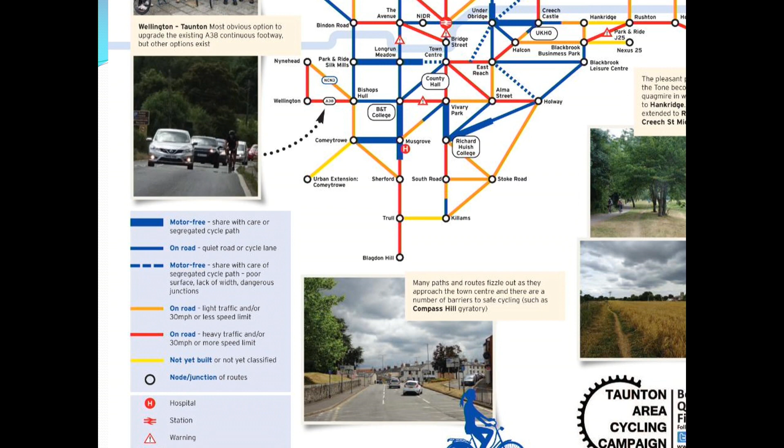We've got an amazing group of cyclists who are very keen to improve the facilities we have for cycling in Taunton. They've come up with this underground map showing the routes. The blue routes are good to cycle, the orange ones are not so good, and the red ones are to be avoided. As soon as you do something like that, you can see areas that need to be linked up. So these guys get onto the council saying there's an area here we really need to improve. Sometimes it's not such a big job, it's just that someone hasn't thought about it particularly. It might just be putting an extra cycle lane in. Things like that are quite easy to do.

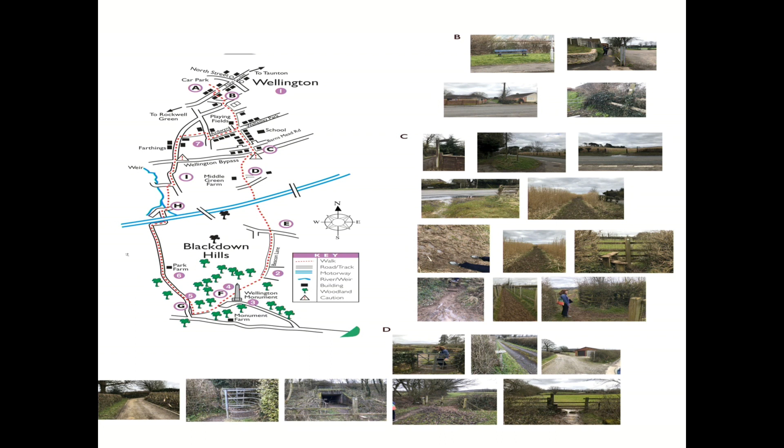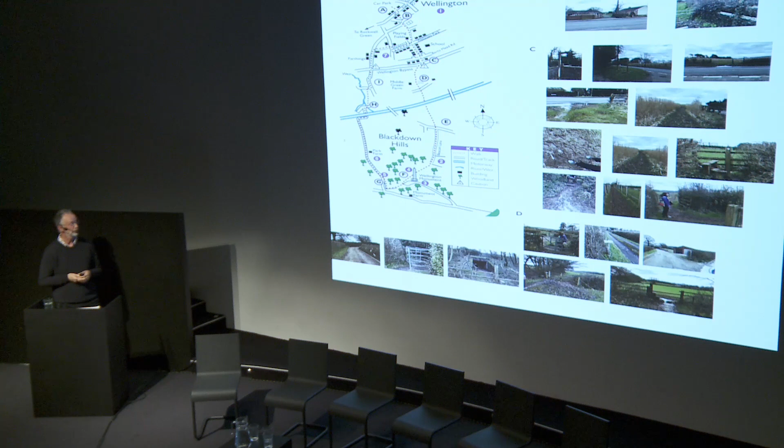We talked about getting out into the open countryside and the fresh air that comes with it. We're working on routes. There's a heritage feature here, a monument to one of our great army leaders, Wellington. It's funny in England because everyone's got their own history and things they think are important. But from my point of view, the important thing isn't the monument itself, it's an attraction, something people can head for. There are lots of obstacles to it, like a motorway, the blue strip, but fortunately there are tunnels underneath. Then it's a question of improving signage so people understand how to get there, and also improving the surfaces and the gates people have to go through, along with some of the heritage features.

One thing I've found very good for engaging with communities is working with artists. Artists come in lots of different guises, from sculptors to performance artists and visual artists, trying to engage the spaces where you've got open spaces, piazzas. I don't know Prague well enough to know how the art scene works, but there are always opportunities to get people to interact, to come out and enjoy those spaces.

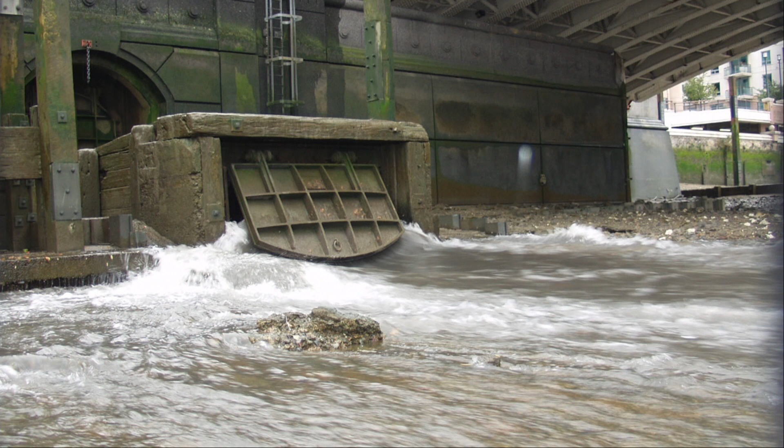Sometimes it's coming down so fast that our sewer systems can't cope, so we get flooding in our streets, sometimes in our homes. Particularly in older cities, we have old sewer networks where we mixed rainwater and foul sewage in the same pipes. When it's not raining, they can cope, and they take that sewage to a sewage treatment works. But often, because we are increasingly developing our urban environment, it puts a lot more stress on these old sewers.

And this happens in the UK. It's called a combined sewer overflow event. Basically what happens is there are these valves, so when there's too much rain in the system, a mixture of rain and sewage just flows out into our streams and rivers. That's a source of pollution to our waterways, which is something we get very upset about.

Another source of pollution is actually something we're all responsible for. We drive around our cities, and on our roads and car parks, pollution is building up every day wherever we drive. We are dropping oils and fuels, so we've got hydrocarbons, very toxic materials. We have heavy metals falling off car bodywork, off our brake discs and engine parts, and our tires wear down. Every day we drive, we lose a little bit of our tires, and that's a microplastic, and it builds up as a dust on the surface of the roads, and gets washed into streams and rivers.

In Norway, they did a study to look at their sources of microplastic in the marine environment—that's microplastics that enter the marine environment directly as a microplastic, rather than litter which slowly breaks down to microplastic. This included things like painting and maintenance of ships and boats and actual plastic production itself, things we might have heard about like washing our plastic clothing, and right at the end, the little microbeads in our cosmetics. But if you add up all those other domestic and industrial producers of marine microplastic, they still don't add up to the wear and tear from car tires from our urban environments.

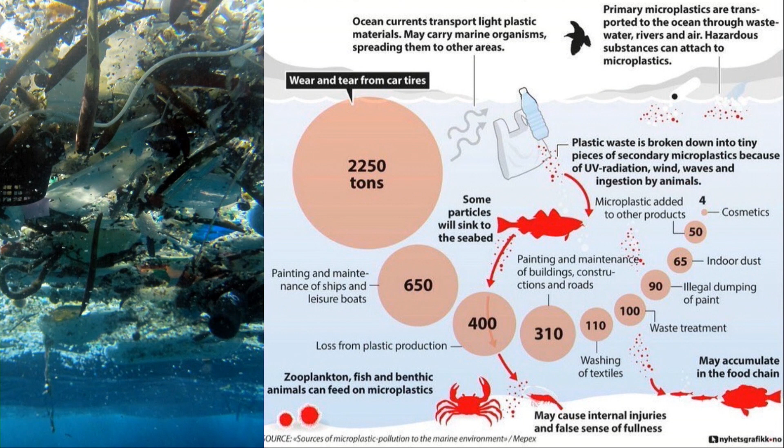Then the other issue is heat. Particularly in summer, our urban surfaces warm up, and then when it rains on them, that rain also warms up. And the warmer that water is, the less oxygen it can carry dissolved in the water. This happens in summer after a few weeks without any rain—the longer we have between rainfall events, the more pollution builds up, because it's had more time to accumulate. Particularly if in summer you have a few weeks without rain, with this pollution building up, the surfaces are nice and warm, and then you get a small rainfall event, so it doesn't have to be very big. What you get hitting the rivers is low oxygen, highly polluted, warm water.

And really the solution is we're trying to emulate nature. So we're not trying to make our urban environments woodlands and forests, but we're trying to look at the qualities of how nature manages rain, because we do it so differently.

So in nature, what we find is actually most of the rain that lands on a natural landscape is either evaporated or transpired by plants. If it does get through to the forest canopy or the natural landscape floor, it then tends to soak into the ground, enters deep into aquifers and our geology, may start traveling across the surface eventually and start filling up ponds and wetlands and little what we call ephemeral ponds, temporary ponds, where depressions in the landscape fill up with water, and might very slowly migrate their way through soils and through geology to

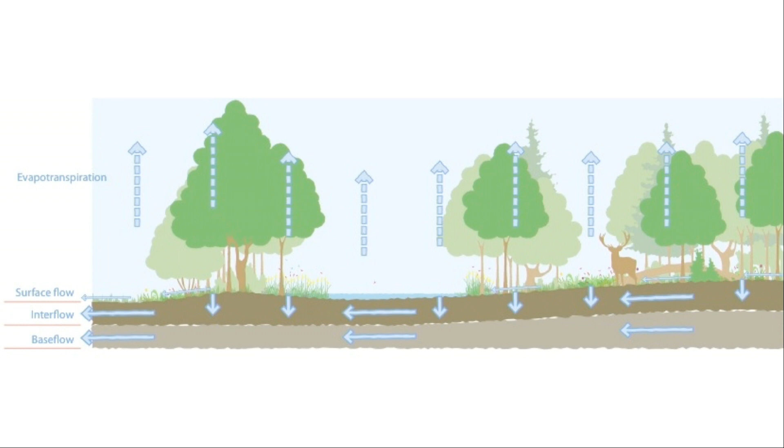streams and rivers. And what we see in the natural landscape is then very few flows at the surface. So these tiny little arrows at the top indicate that actually what we see traveling over the surface is very minimal, and there's also a huge delay before that happens. So after a rainfall event, there are huge delays for the rain that lands on that landscape. Most of it is lost, and then what does make its way to streams and rivers does so very slowly.

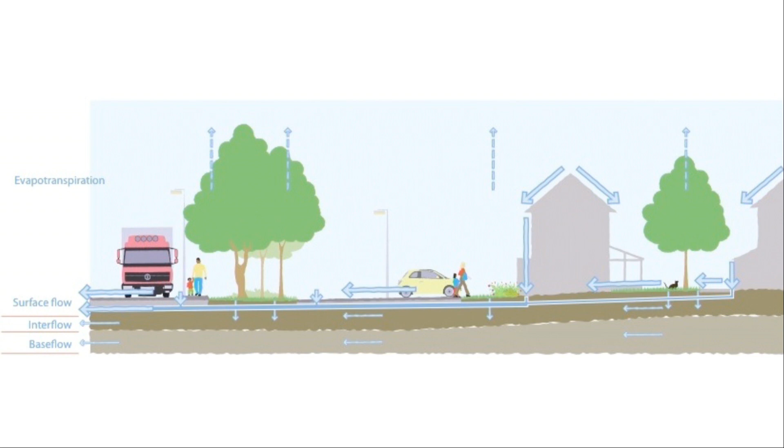In the urban environment, this could almost be Prague, just try and imagine. You have nicer buildings and nicer paving and more Skodas, but apart from that, it could be Prague. In this urban environment, it behaves very, very differently. So we've paved all our surfaces. We have taken away all the opportunity for water to be lost into the ground. We have much less vegetation, so we have much less transpiration of water up into the air.

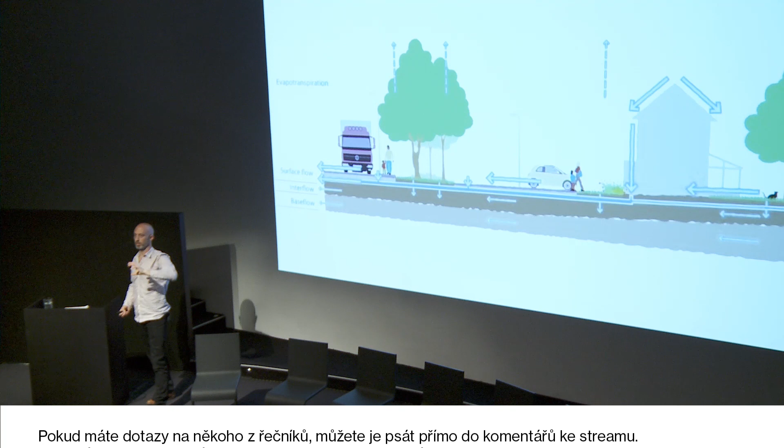And what we see is a reversal of all those arrows. So we've stolen water from the ground, we've stolen water from the air, so we have much bigger volumes now, rushing more at the surface, either as surface flow or in our surface sewers, going straight to streams and rivers. And so what we see is a really intense rainfall event landing on an urban environment very quickly delivers a really intense burst of water into our streams and rivers or sewers, and they just can't cope with that pattern of water.

And what we need to do is ask our urban environments to behave very differently. So we need to ask them to behave hydraulically much more like the natural environment. We need to ask them to work a lot harder. Every surface of the urban environment, we need to challenge it to work harder with rainwater, so that we can reverse those arrows back again, so that we can maximize evapotranspiration, maximize losses into the ground. And we need our urban environments to act like a sponge. We may have heard the term sponge cities, they call it in China. And with our landscapes, we try and create sponges.

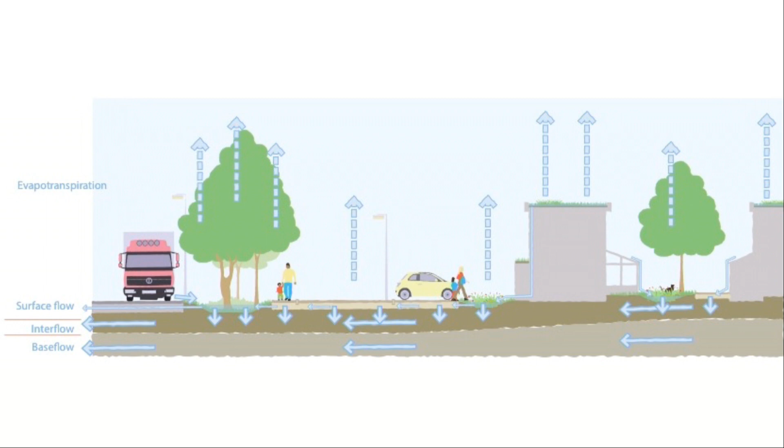They would get as close as they can, kick their kid out of the car, and then fight all the other drivers to get back out again. And that led to a lot of pollution. It made this road very dangerous to cross. So that was a vicious cycle. People were then even more inclined to drive because that felt like the safest thing to do. So it didn't work socially. It wasn't a healthy or a safe route to school, and the local community wanted to change that.

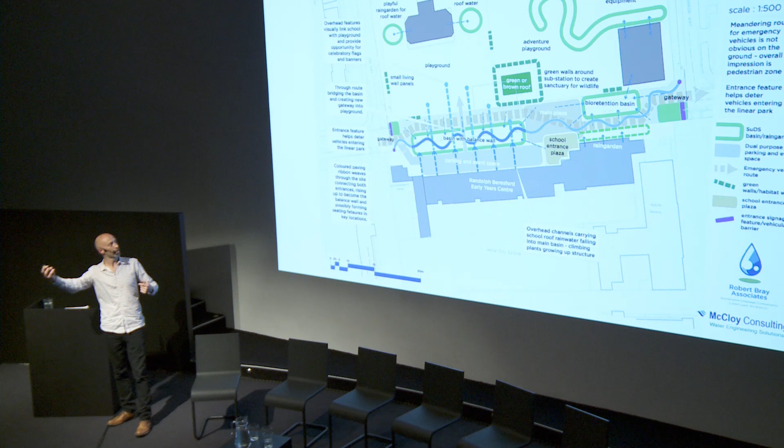So we did much like most landscape architects would do. We look at the character of the space, the ingredients we might put in here, the benefits to people and wildlife. There's a few water management features in there. But we always consider the water management in tandem with everything else we do as a landscape architect, all those other considerations of people, place, and wildlife. Water is just another one of those we consider completely simultaneously. We came up with the concept ideas of how we might manage the water off the school roofs, the hard surfaces themselves, trying to steal water from as many adjacent roofs as we could to maximize the impact of our scheme.

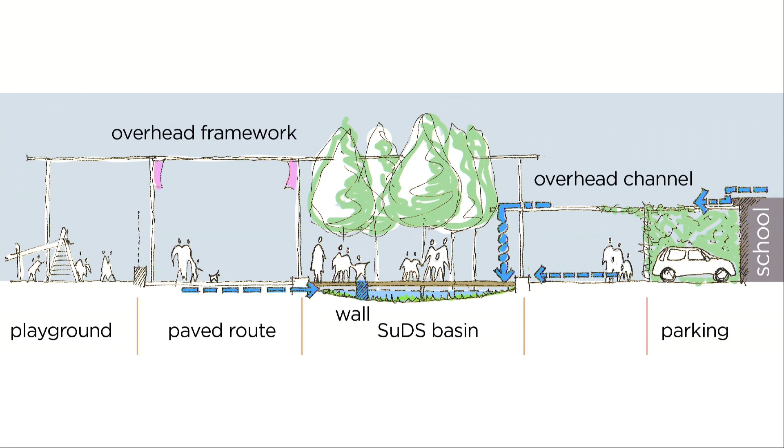And right through the very early concept ideas, these early sectional sketches, we're looking at how we can create some visual connection between the school and the playground, make this a dynamic, playful, family-orientated space, at the same time as we're thinking how water might be part of that, how we can take water off a roof and bring it overhead. The opportunity is that water is higher on a roof, so we can bring it overhead and drop it into the center of the space in really interesting ways. Fill up basins where we have the wall feature and bridges, so people can interact with these features that occasionally have water in and see them fill up when it rains.

So these more developed sketches, you can see we're looking at what these ingredients might look like. Some of these are just about placemaking, connectivity, new gateways into the playground. But then we're also looking at the idea of the basin with the wall running through it and these water features coming down. And this is what we produced.

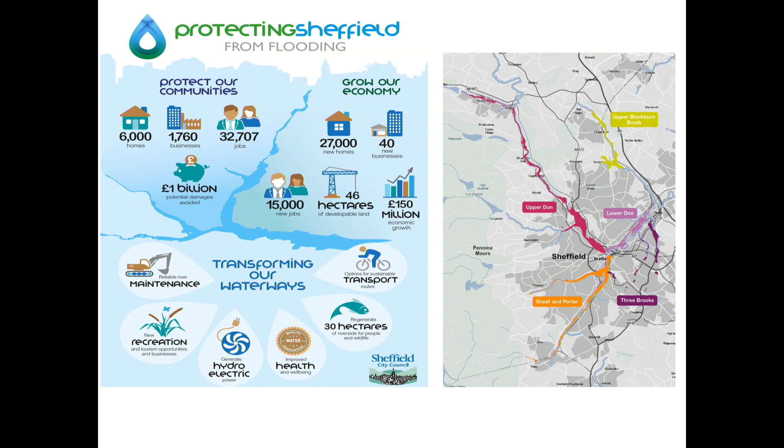Businesses are obviously incredibly important for the economy, so we reduce the flood risk to encourage development. But obviously also here, transforming our waterways. Can we think creatively about how we do that? Can we get other benefits at the same time, like biodiversity, recreation? It brings in other money as well. So being creative - just some examples here.

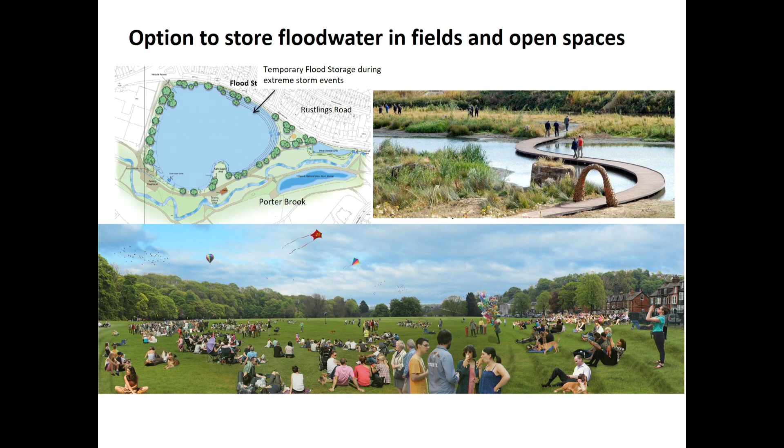We're looking at this park, which is one of the most popular parks, but it's right on the river. Can we use that park and modify it to hold water, hundreds of thousands of cubic meters of water, allow the river to flood into there, hold back, and basically this floods the railway station in the worst events. So we're trying to reduce that as a key transport hub.

So this was trying to be creative with flood defences. It's not always just shove a wall up. We're trying to reduce the walls - that's the traditional default, we build a wall, keep the river out. This is just trying to be more creative with walls, integrating it with green space, access to the river, trying to make an asset at the same time.

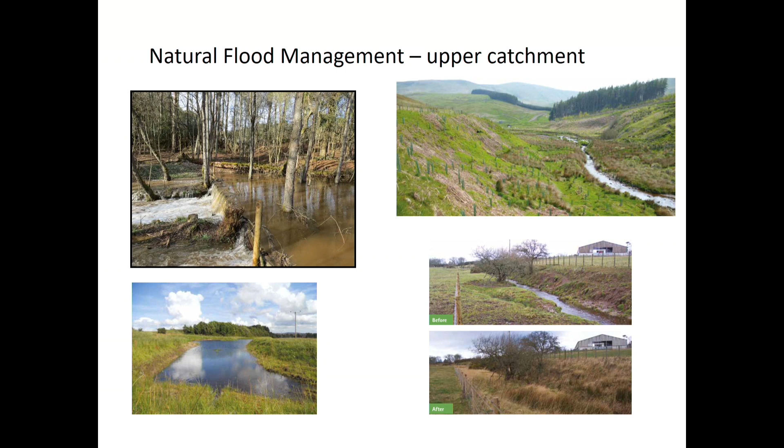Just to say, we're starting to look outside the city - how do you keep rain from coming into the city on those river systems, holding the flow back, looking at the whole rural environment around Sheffield. A variety of ideas: creating wetlands and ponds within farmland, creating woody dams, planting woodland. Woodland obviously intercepts rain, intercepts in the canopies, promotes infiltration. That can really improve the catchment response and take the peak off rivers. So this is the macro blue-green, if you like, outside the city.

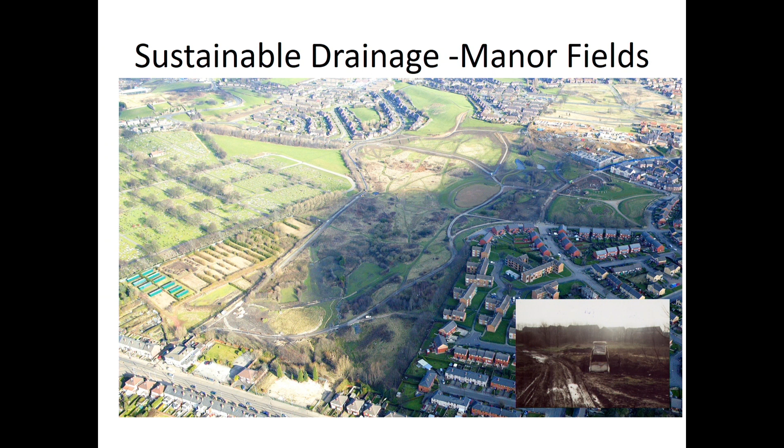Just briefly talk about this project I was involved with from just before 2000. This is a new park in a very difficult area socially - lots of housing had been demolished because it's in such poor condition. This was trying to build a park, a place for 25,000 people. They didn't have a park, but it was abused - massive amounts of car racing, stolen cars every weekend. I'd come and clear those away. So it was really problematic.

This is a multi-year project, so it's still happening, but it was about teasing out the green infrastructure that was there. It was just filled with cars and rubbish and arson and burning - it was an awful, dangerous place. So it's a matter of teasing out the green infrastructure and framing that as something that's been cared for. That's the semi-natural vegetation we're trying to bring back to life, and the water as well. This was filled with rubbish, this stream, literally meters of rubbish within a channel. So the blue becoming a positive asset.

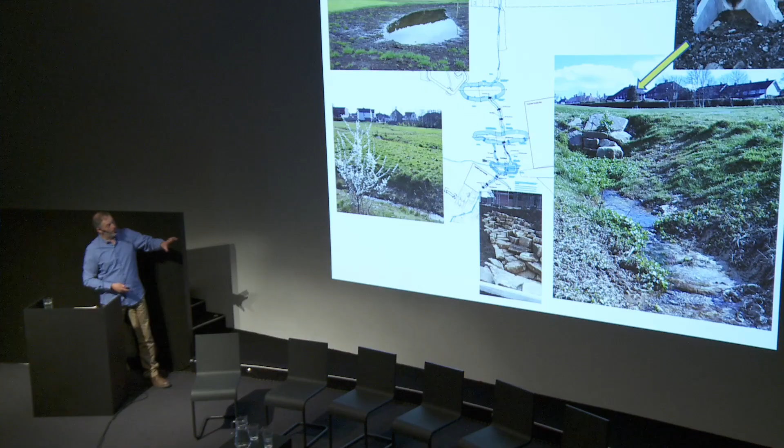So just a few slides of schemes that have gone in relatively recently on parks, just holding water in different situations. This one is holding about 6,000 cubic meters from 7 hectares of housing, a series of wetlands and channels. This is now going to be maturing over the next year, but that's a huge saving for those developments.

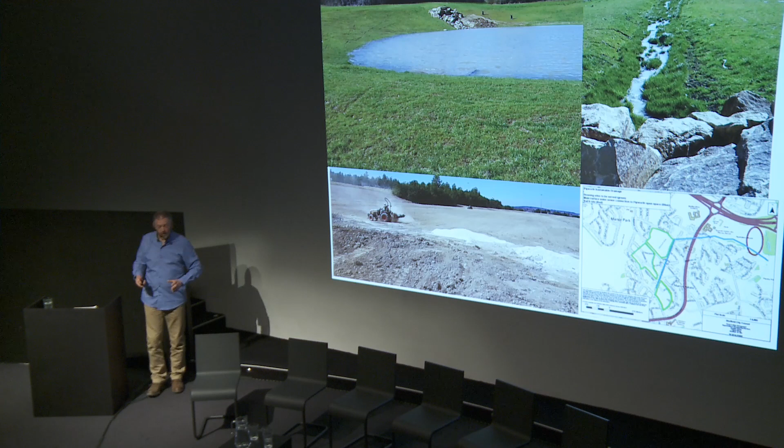And I should just say, for all these developments, each household is paying only about £20, so about €22 a year for all the services of managing this water on these parks. It's a small amount of money, but it gives us income forever to look after these facilities.

So we've explored this with the water company. We have private water companies in England, and it's really difficult working with a profit-making organisation. But we're examining the whole sewer system for the city. Where are the problems where you might get surface flooding or more pollution, like Kevin was talking about, the combined sewer overflows, polluting watercourses. There's a lot of that in Sheffield. How can we pull the flow using those sort of retrofit SUD schemes in the street scene?

I'm going to talk about Grey to Green, that's the title in my presentation, but this is our flagship retrofit SUDs. It's the one that's making people see that you can do this. Yes, it's a high profile setting, but the principles are all there. This is the city centre of Sheffield.

Briefly talk about some of the ideas. We've got these routes, these coloured routes, the gold route and the steel route, as they're called. These are kind of routes of improvement in the public realm to get more quality to the city. So you can read the city as you go through it, and it's very clear where you're going from the railway station here up through the main part, and different zones of the city, like the cultural industry quarter, the retail quarter, hang around those routes.

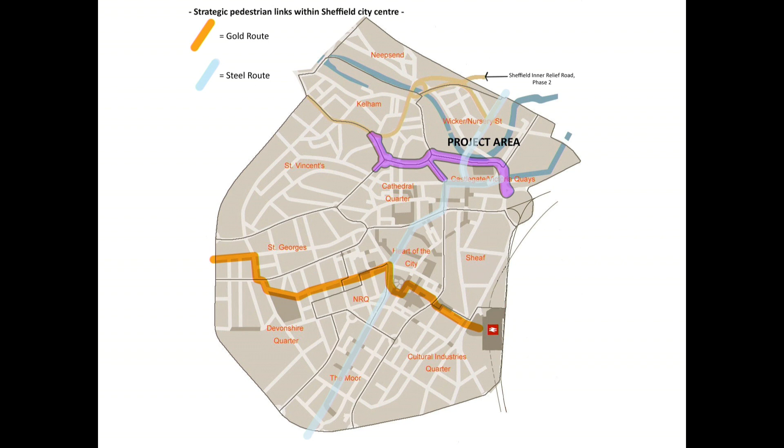The purple route is the Grey to Green route, and that's really emerged because at the top of the slide, we actually moved the traffic out of the city centre. There was a huge flow along that purple route of most of the traffic going towards the main motorway for Sheffield. And it was right, really, in the heart of the city. So they chose to move that traffic to the north.

I'm going to talk briefly about Grey to Green now. The principles behind it is that creating a setting for investment. This is very much a regeneration project, changing the nature of an area to encourage the building out of plots,

the increase in land value, and the employment and so on in that area. But saying, well, actually, could we do things, layer this up and get lots of benefits from one footprint? Can we use the new green areas for managing surface water? Could we create more cycle routes, pedestrian connectivity across the city? Could we do the planting differently? Not your standard vegetation, something that can actually provide biodiversity, as much colour through the year as possible, and quite an informal sort of vegetation.

And the city garden is this principle that cities are changing. Certainly Sheffield struggles retail-wise. It's no longer kind of shopping only for city centres. It needs to do other things. We have out-of-town shopping centres. We need to have other attractions in cities. There's more people living in cities, in the city centre. So the horticultural excellence is something that we want to promote in the city.

And the SUDs idea there is this isn't necessarily a big problem of water in this area. It's saying, well, while we're doing this regeneration, we're going to take an opportunity. We're going to regret nothing. We're going to build water into these landscapes to demonstrate it. It's in effect like future-proofing.

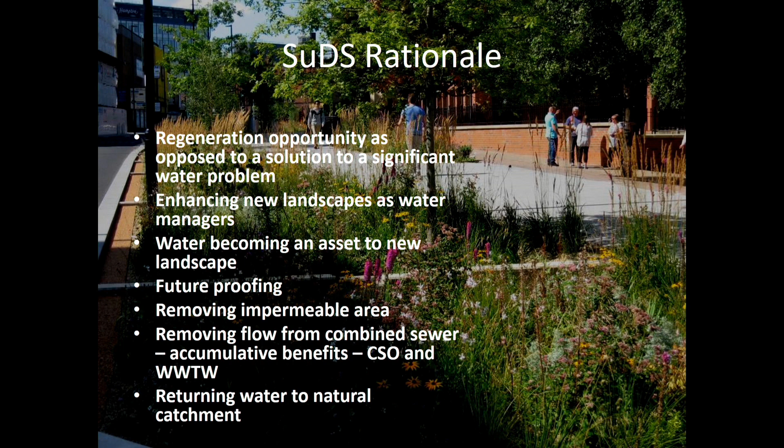We're taking out impermeable area. We're improving the performance of drainage in that area. We're taking that flow out of the sewer, and we're taking it to the river in this case. So we're returning it to its natural route, cleaned and controlled through this system.

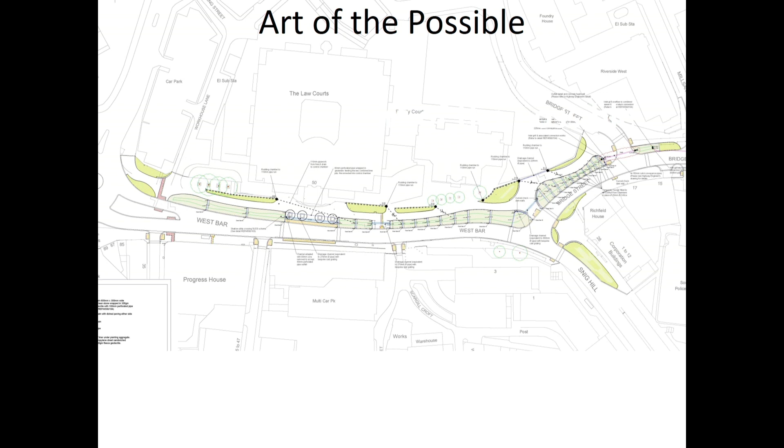And the art of the possible, I suppose what I'll describe here is linear along the road, and it's divided into a series of cells because it falls from one end to the other, and we've effectively created lots of level spaces along this route that hold the water. And that gives you what you can deliver in terms of water benefit. You've got the contributing roads and paths, and these cells hold that water back.

You know, people are walking this route now to work. They've chosen this route because it's an attractive place to be. It's full of colour all the way through the year. You know, that's the sort of story that we've heard so far happening here with Grey to Green. And that immersion within vegetation within the city, almost like you're in the countryside, that meadow surrounding the footpaths.

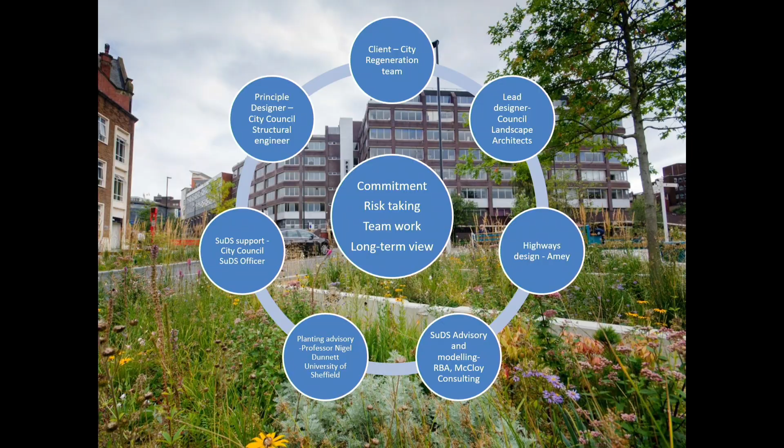I'm pleased to say Zach is the principal landscape architect. He's now moved on to another scheme, so he's just going, we're going to do this everywhere now - we're going to make every green bit blue in the city centre as part of our regeneration. That's a great story that somebody's been able to do that. Zach didn't know any SuDS things before - he's a landscape architect, but Robert Bray Associates, where Kevin works, just gave him some advice, and that was enough for him to feel confident to move forward, because these things aren't necessarily complicated.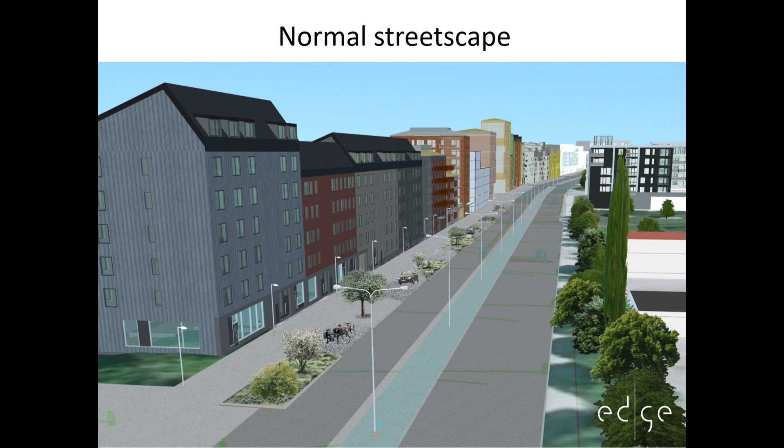Then we came up with the idea that we would have a sub-base layer everywhere. The sub-base layer is one part of this superstructure for a hard surface. So this area, this layer here, is the sub-base layer for roads, which you have everywhere. Normally it consists of crushed rock in the fraction from 0 up to 90 millimeters.

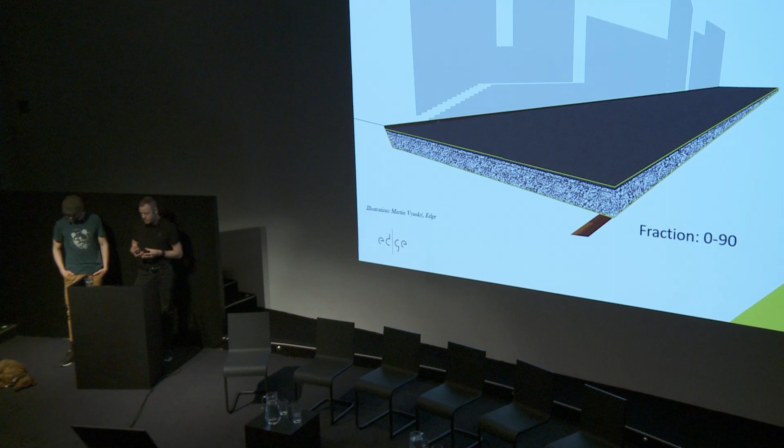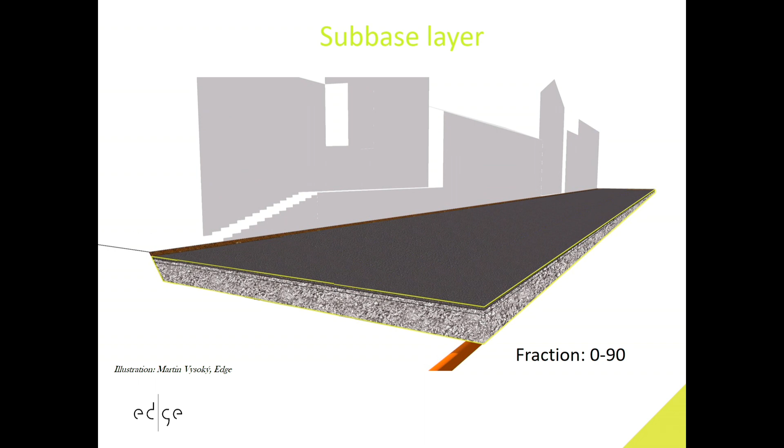But the problem with this material is that you have no chance to let water into it, and no chance to let roots into it. So we came up with a new idea: we can change this sub-base layer to another type of material where, instead of starting from 0, we start from around 16 millimeters and go up to 90 millimeters instead. Then we get a porosity in this material of around 35%, which means you can store around 350 liters per cubic meter in this open sub-base layer.

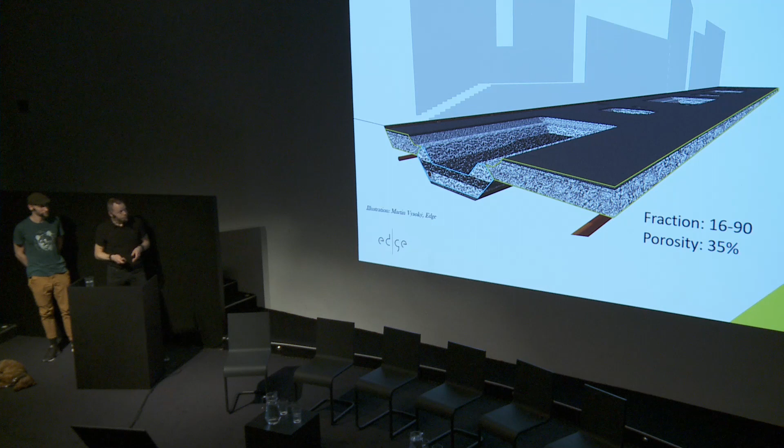So instead, we put out this open sub-base layer, and it depends on how much you need - whether you only put it under and between plantations, or if you go into the road, or into the cycle and walking path. Then you create a layer like this with this open sub-base layer.

There's another very good thing: when you can get water into this layer, you also get root zones, because the roots get sugar from the leaves, and a big part of this sugar leaks out into the rhizosphere, feeding the microorganisms there. They help us clean the stormwater that has come into the system. Then we can design our surface and streetscape however we want, because it doesn't matter how we change it.

We will have this layer, and we can use it for the root zone and the stormwater. And we can also drive cars above it without any problem that it will sink down. Because when we take away these fine materials, we sent it to a big lab where we built up a huge construction and tested what load it will manage. And it's the same, more or less, as the normal superstructure material that you use.

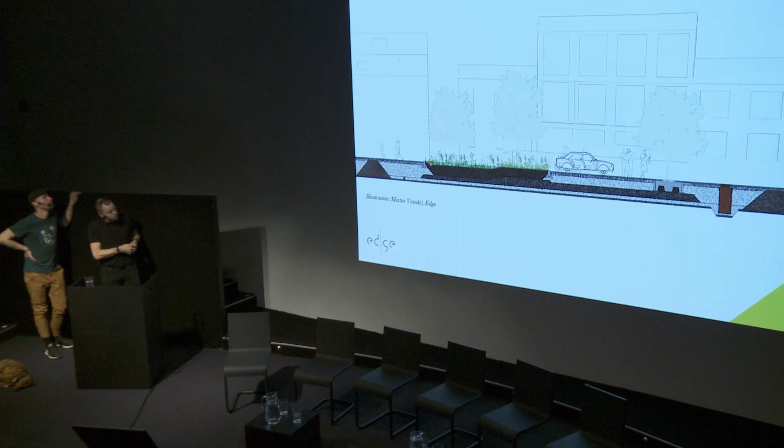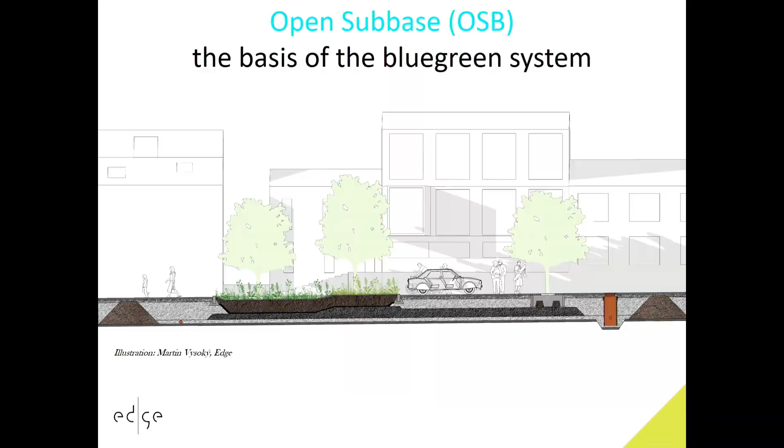And in a length, it will look like this. Here you have a submerged plantation. And here you have a normal plantation that you have above this open subbase layer. And then you can have a tree trench where you have the hard surface around. And it can look like this. This is a plantation above this open subbase layer.

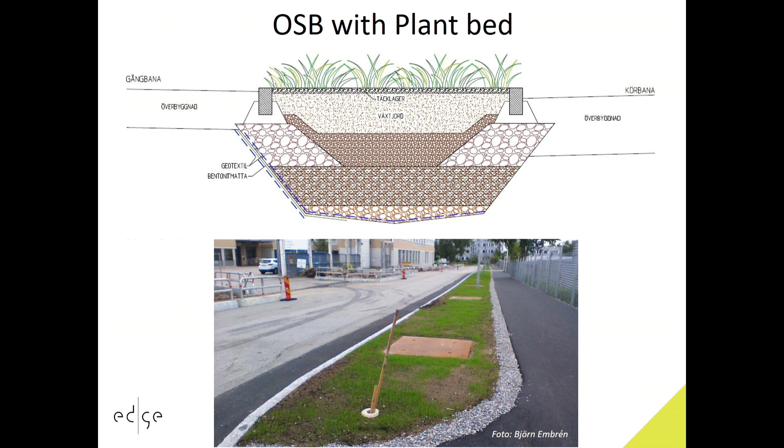And either you can let the water in through a gravel ditch like this, so it comes in here and fills up the system, or you can do like they have been doing in Graz in Austria, where they use a well, like you see here, to take in the water. It depends a little on how you want the streetscape to look.

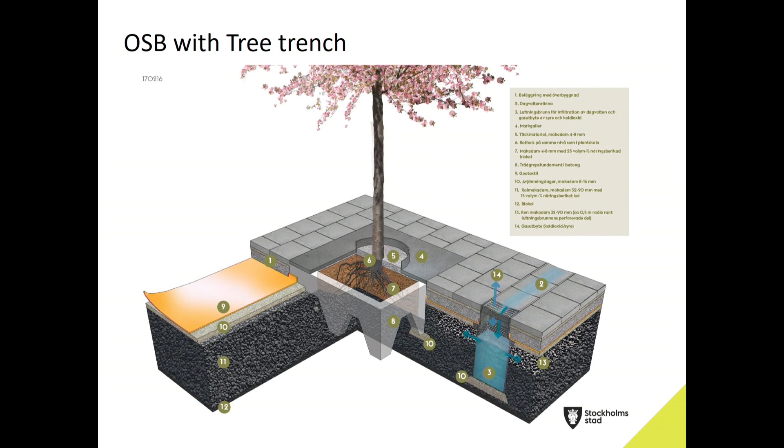Another construction that you can put in is this tree trench, where you have this hard surface around, and then you also have a well that takes in the water, and it will spread in this open subbase layer. And it can look like this. This is a picture from Stockholm, where you see this open subbase layer here.

And often we also mix it with biochar. It's a product that you produce from organic waste. And it's very good, both because it will make a better root zone for plantation, because it can hold water and nutrition. But it also helps with cleaning of the water, and the microorganisms like this biochar very much, so it's a very good environment for them, and then they will grow and be a better community and help us even more with the cleaning.

And also this will be like a carbon sink, because instead of it going up in our air, we take it down, and here it can stay for thousands of years before it will break down. And then we pave it with hard surface above.

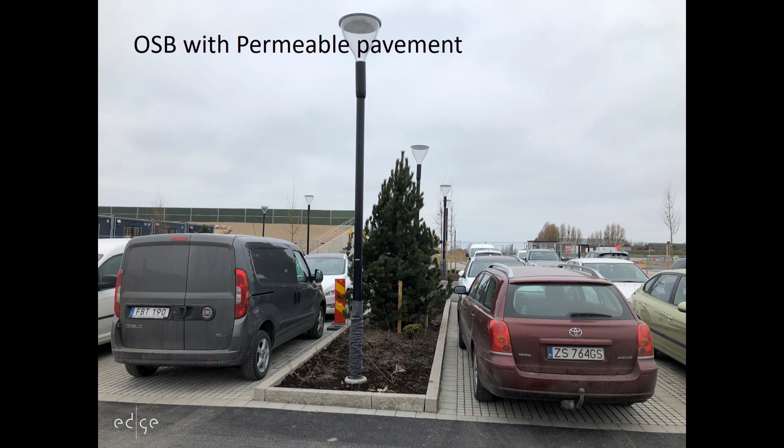And another construction you can use is the permeable pavement or permeable surface. So this hard surface here is permeable. So the water goes through this, and under here we have this open subbase layer, and it's like a huge magazine where you can store water. But in the same way, it's a big root zone for the trees. So this pine tree here can very easily go out with its roots under here and get a lot of water, so it can grow very well.

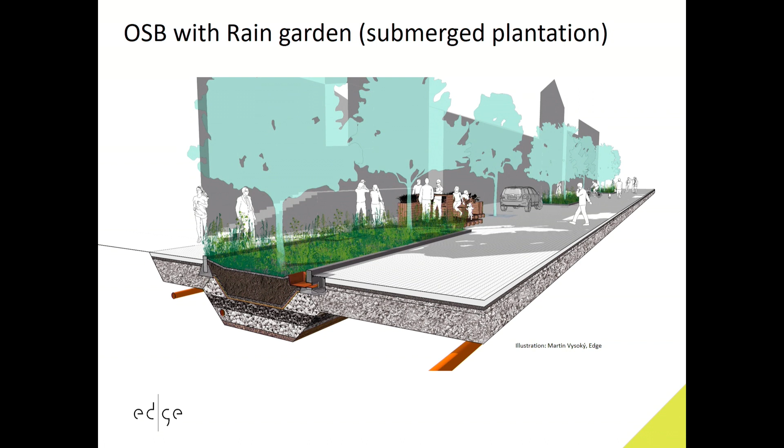And another construction that is very popular now is something that we call a rain garden, and it's a submerged plantation. So this plantation here is lower than the surrounding surface, so you will let water into this structure, and it should flood and be standing water here for a couple of hours before it infiltrates down to the lower layers. So it should look like this. That's the purpose of this construction, a rain garden.

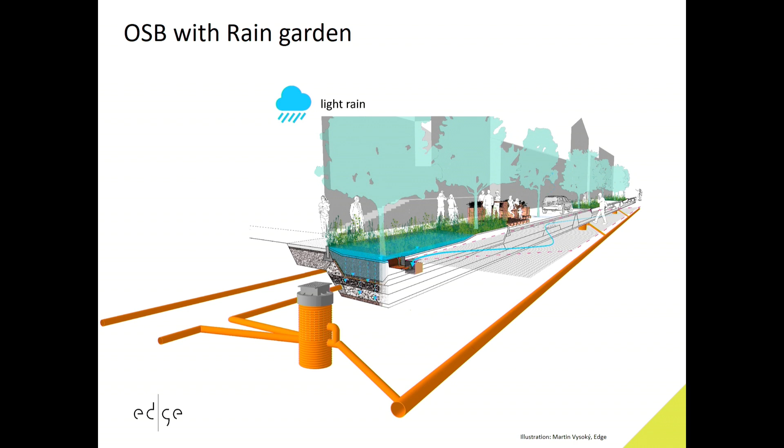So how is this system then working when it comes to flow and where we store the volume of water? Here we have a hard surface that after the rain starts to run off, and then it first goes into this submerged plantation, the rain garden, and it will flood here, and then it starts to infiltrate down to the bottom. And if the rain continues, then it will fill up a zone in the bottom full with water, and then if it rises a little more, then it starts to continue.

And it depends on how you want to control it. This is a control well. So either you can send it out to the pipe system, or you can send it to the next magazine lower down the street. And if you get a very heavy rain, you fill up this rain garden first, and when it's full, then the water continues to this control well and goes into this one, and then spreads in this open subbase layer.

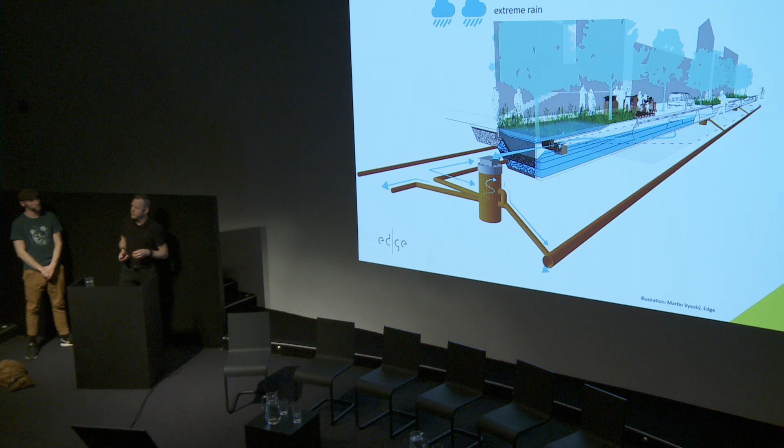Because normally this magazine here can store around 15 millimeters of rain, but this under magazine can store between 40 to 60 millimeters of rain. So it's a lot of rain. And then when we have a dry period, we can store water in the bottom of the system, and you can rather easily change how much water you want to store, depending on how long dry periods you have.

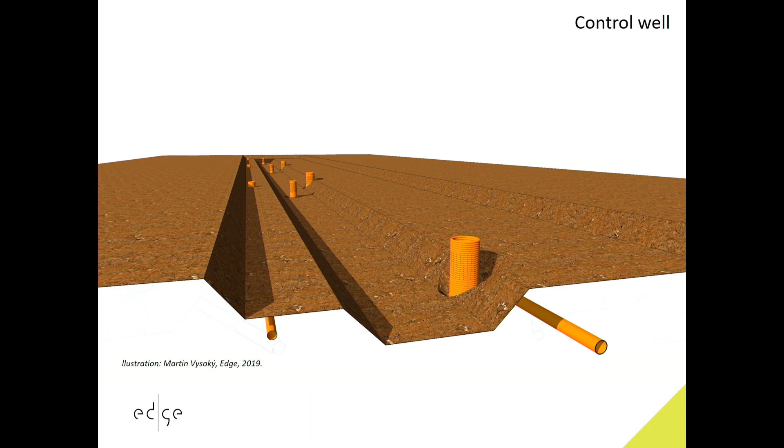And it can look like this when it's built. And then I will show you some pictures also of how easy it is to build this construction, because it's one thing to draw it, but it's another thing that it also should fit into the building process. So first you go and excavate a very big hole here, and you place the stormwater pipes, the sewer pipe, the drinking pipe, and maybe the heating pipe.

And then when you fill up, you form this grade where you will later build your construction. And in the future, you will have buildings here. This is the road, and then you will have buildings on the other side. And it can look like this. And here you can see this control well that we have placed.

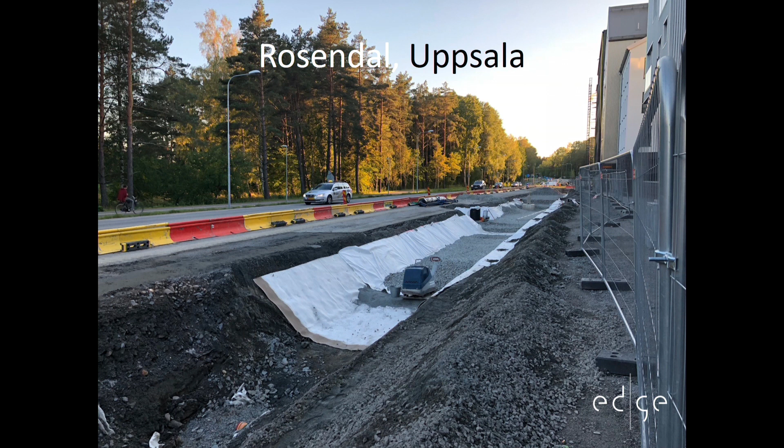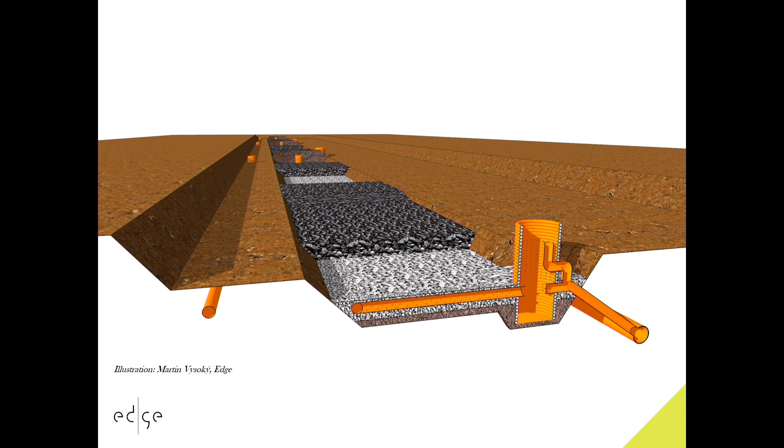And then we fill up in the bottom with a coarse gravel layer. And in this case, we are in the protection area for water. So because of that, we needed to seal, so we can't pollute the groundwater and the drinking water. And then we fill up where we want to have our plantation with this open subbase layer combined with biochar. And then we have a finished construction road.

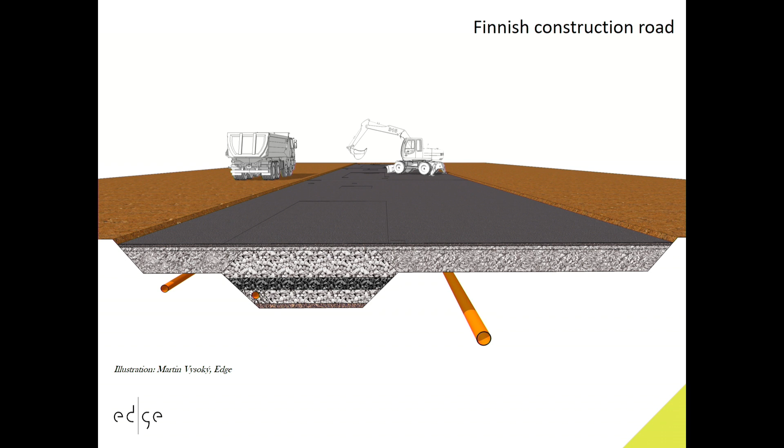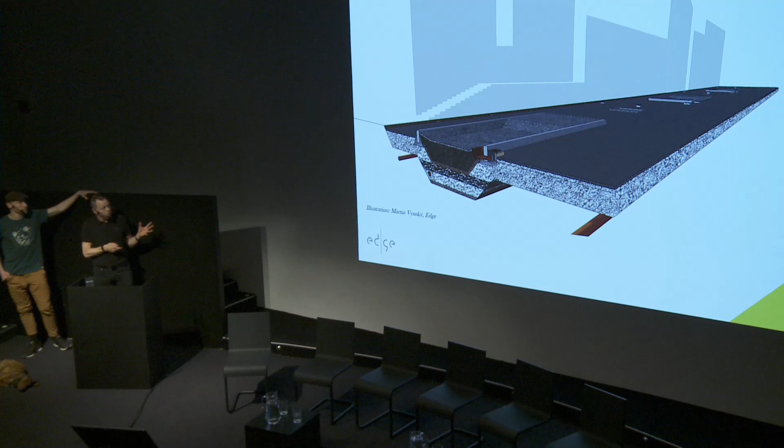And now we can go in and start to build the houses on both sides. And you can drive with all your heavy machines everywhere, because there is no construction standing up that you can destroy, even where you will in the future have your plantation. It's no problem to travel with very heavy loads on it. And then you go back after you have built the house, dig a little hole and fill up with the topsoil, and then you plant the site, and then it's the finished result.

So to sum up, it's quite a lot of information to process. It's a lot of pieces of the puzzle that you need to connect. It takes time, but we try to sum up for you the effects of this possible alternative. And that's if we have current conditions like today, and what's possible to do. We still have this need to have parking places, to have places where the car can drive. And at the same time, we still need to address these problems.

What is possible to do is that we can still have hard surfaces, but we need at least, for example, 5% more vegetation if we want to have some trees. And we want them if we want to have good environments in these climatic extremes. Or there are situations when you don't really need a green infrastructure. Then you can still have your hard surfaces, and you can still provide a stormwater function by using this open subbase layer.

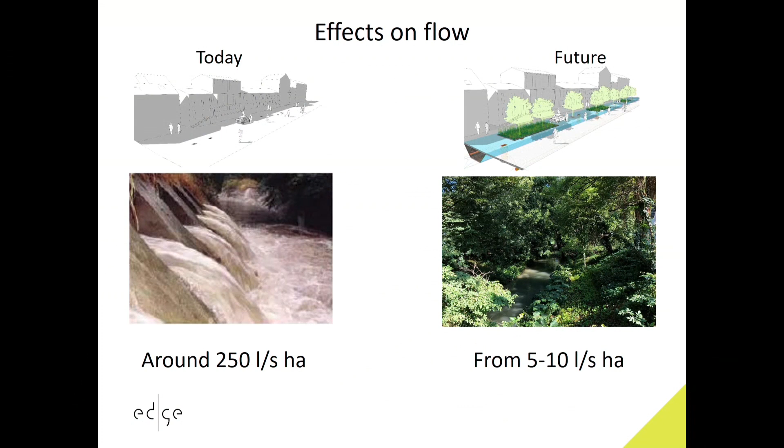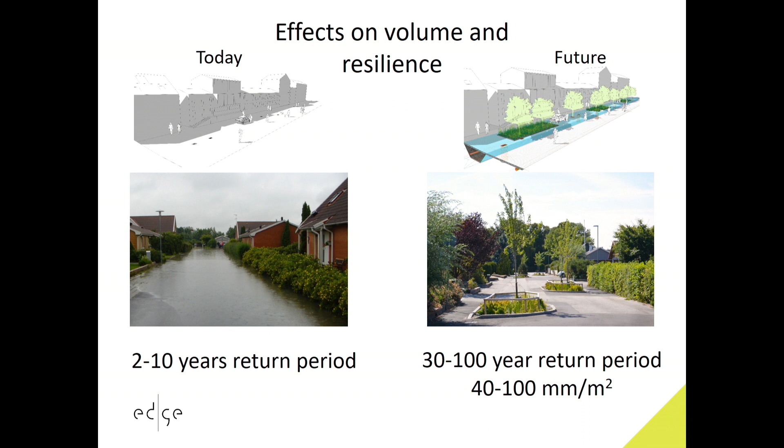In terms of effects on the flow, we can lower the flow to this extent, so we can capture really a lot of volumes in the city. And if we capture a lot of volumes in the city, then we can decrease the risk of flooding and decrease the damage costs. So therefore, we can increase the city's resilience. We can decrease the heat by providing mainly shade. And therefore, we can also decrease the costs for energy.

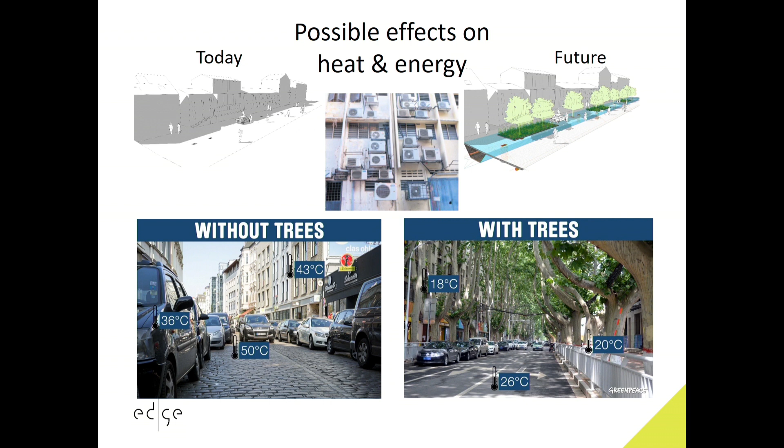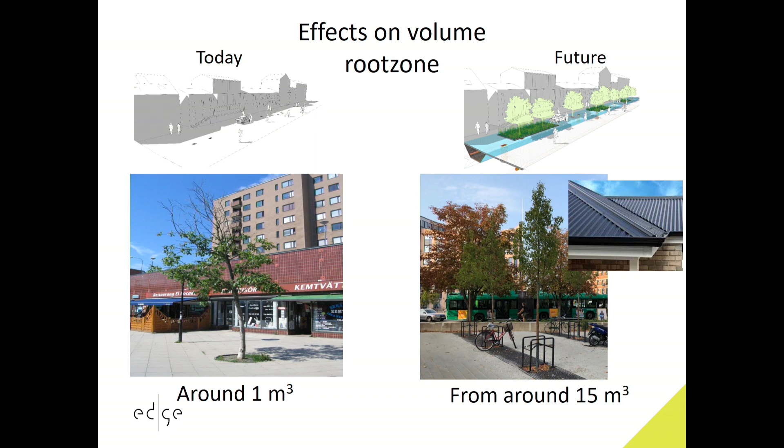And of course, with the system, we are creating such a huge root zone that the trees can spread their roots and get more air. They can get water even from the roofs. It's possible to connect it to the system. I would just like to mention this picture that was taken last year during summertime in Malmö, where you can see our system on this kind of construction. And the young trees are thriving compared to the older ones that are already more established. And the system is even prepared to take care of the grey water from washing machines, for example.

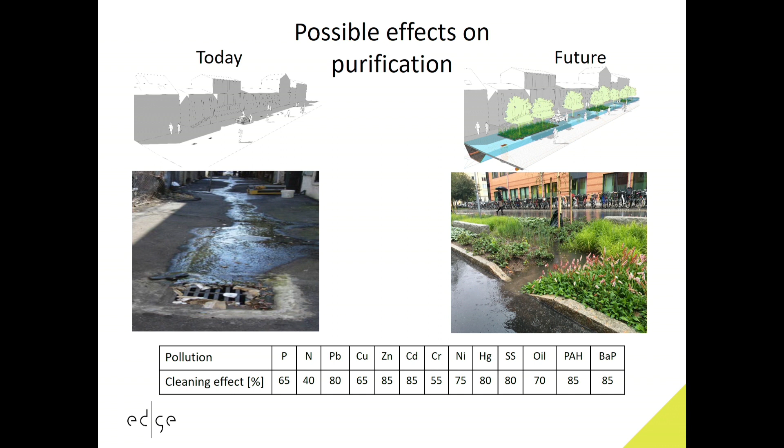In terms of the effect on purification, if you use this kind of solution, a rain garden, we can filter around 80% of pollutants. And this value is quite underestimated, because we don't factor in the vegetation, which also has a positive effect on capturing the pollutants. And of course, we're actually creating possibilities to connect the silos and start to collaborate and exchange information with each other. Because it really needs collective city development if we want to address these problems.

In terms of effects on the economy, compared to traditional piping solutions, this alternative with blue-green infrastructure can be cheaper in terms of investment cost. And again, it's quite underestimated, because these solutions address so many co-benefits that are not calculated in these calculations. And I didn't even mention how great it feels to be around these kinds of green environments. So therefore it has a positive effect on mental health.